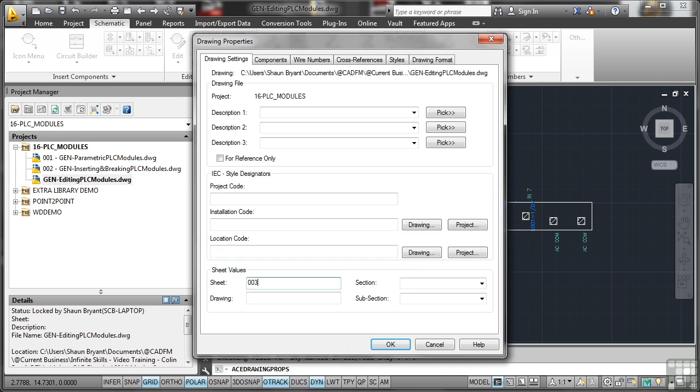As usual, I've created another drawing for you, General Editing PLC Modules, so we'll add that to the project. I can't stress it enough, always add your active drawing to your project. Confirm the project default values, and I'll right-click, Properties, Drawing Properties, and give that a sheet value of 003 to follow the numbering in the drawing list. You might need to refresh just to get that 003 to come up, but it should be there.

So I've inserted just a regular PLC module into the drawing. I haven't worried about what type it is or anything like that. I'm just going to show you how to edit it. Now there's two ways of doing this.

If you're a ribbon person, you go to the Schematic tab on the ribbon. There's the Edit Components panel. Click on the flyout and select Edit. Using the pick box, you go and pick on your PLC, and as you pick on it, there's the Edit PLC module right there, so I can go and edit information.

What I'll do here is give it a tag of, say, 001, for example, and what we might specify is the installation, which might be, say, SS, and the location, say, EX. I'm not being very descriptive there, but I'm just adding information to the actual PLC as we go.

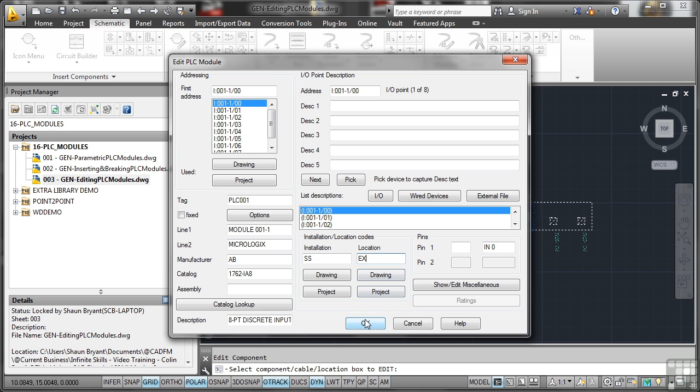So if I click OK now, that all updates, but it will also prompt you: is it in any other drawings? Are there links or references, related components? So you do a batch process and update. Before it does that, it obviously saves the drawing to get the current data, and off it goes. It checks any other drawings with PLCs, and then comes back all tidy and neat.

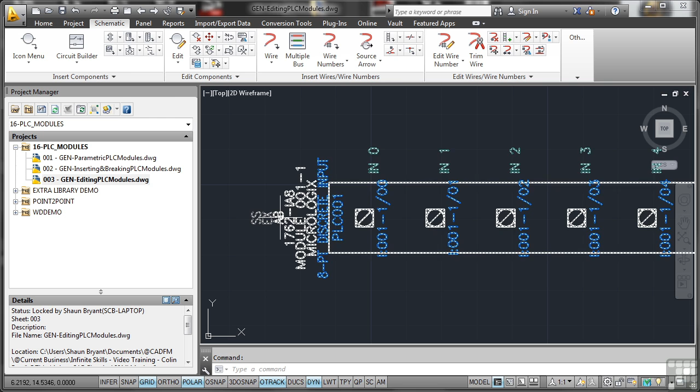So if I zoom in now, you can see SS and EX are there, and it's PLC 001. It gives you a description - it's an AB 1762-IA8, and as you can see, it just updates as it goes.

Now, if I'm actually editing and adding wiring to this, let's go to the Home tab, and we'll create a new layer. I'm just going to open up the layer properties there, and let's check, have we got a layer called wires? We have, excellent.

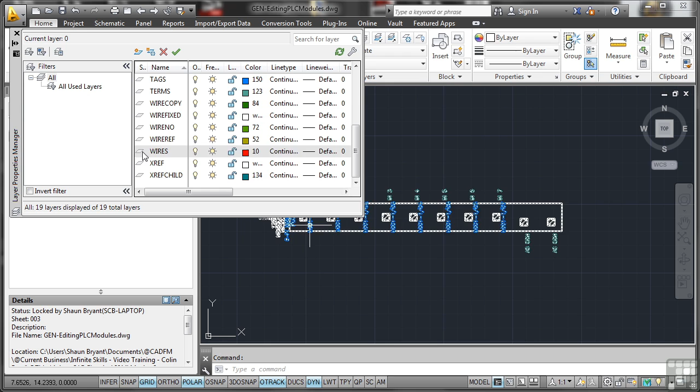So where we're working, we've got a layer called wires. I'm just going to change the color of that to red so it stands out a bit more, like so, and then I'll make it the current layer in the Layer Properties Manager. Now we've got wires as the current layer. I'll go back to the Schematic tab and select the Wire option.

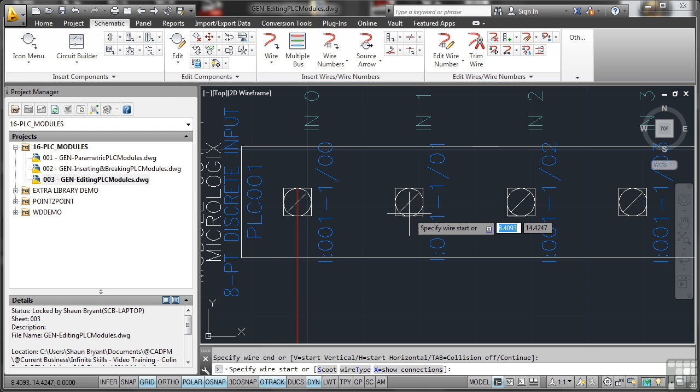If I hover over these, no matter where I click, it'll take the wire from the connector. So if I click there and press Enter to finish, that wire's not going to go anywhere. But if I zoom in now, can you see the wire is actually going across the connector? So if I select this connector now, even though I'm on this side, and pan across, click there, put another wire in and press Enter, you'll see that one has come off the connector on the other side.

So just be careful with this. Because I'm using snaps, it finds my nearest snap there. Just be careful with the way the wire is. You can move that - there's nothing to stop you taking that grip from there down to there, but you need to make sure that your object snaps are on.

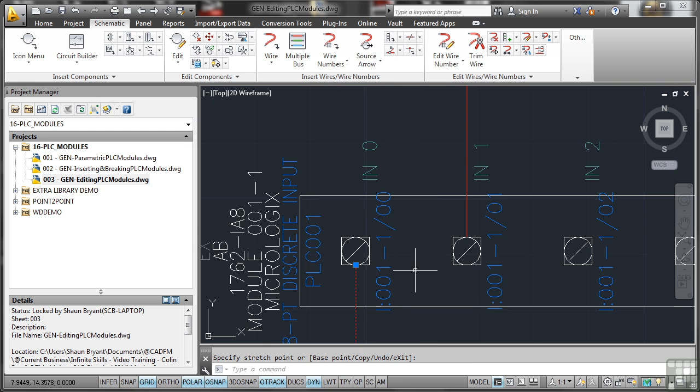So in this case, I'll switch on some object snaps, and if you're editing, it's sometimes good to have these on all the time. Take that to there, and it doesn't actually affect the connection, it just looks tidier. So when you're editing, try and use your object snaps to your advantage.

Now let's draw one more wire. Let's click on the wire there, and I come in here like that. If I click nearest there and move away, can you see what happens? It actually takes the wire across because the connector is actually on that side.

So if I do another wire now and go this side and come out here, can you see that the connector there is obviously on the other side? So you've just got to be careful here about your wiring and where you take it across. Personally, I like it like this - it looks neat and tidy rather than going across the connector.

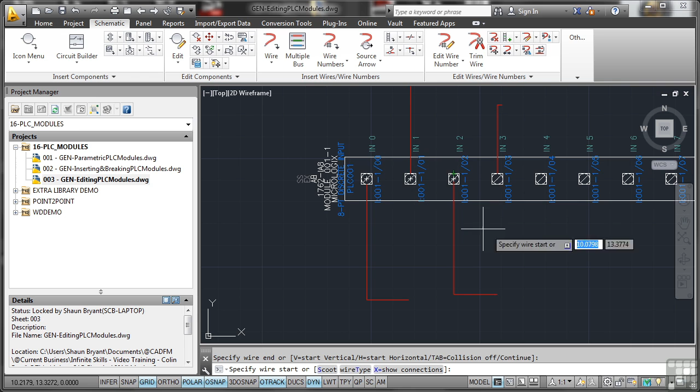So it is sometimes good to make sure that you tidy up your AutoCAD electrical drawings when you're editing things. Just using the object snaps and the grips, make them look professional and neat and tidy. I know it's picky, but a drawing is a representation of you. Make it look as professional as you possibly can. So use those snaps, make everything look good.